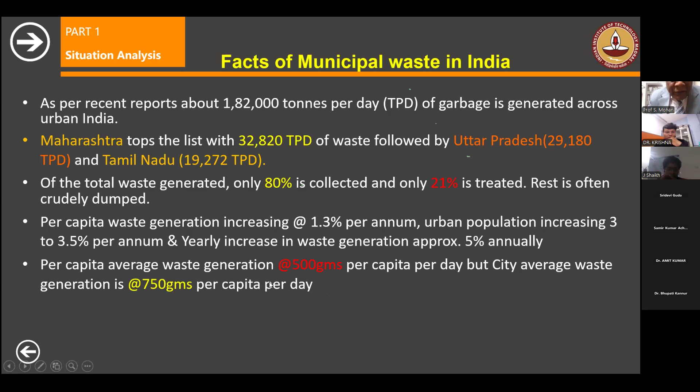And the per capita waste generation is also increasing over the years, especially at the rate of 1.3% per annum, whereas the urban population growth is 3 to 3.5%, so almost half of it is waste generation increasing. The per capita waste generation is around 500 grams per capita per day, but the city average, especially in Chennai, goes up to 750 grams - almost nearing 1 kg per capita per day. So for everyone, it's generating around 1 kg per capita per day.

Still, almost 75% of municipal authorities are continually dumping their municipal waste in an unhygienic manner, leading to health issues and environmental degradation. In fact, if you look at WHO data, there are around 25 types of diseases that can be prevented if we are good at solid waste management in India.

And if you look at it, every day almost 2 hectares of precious land is lost, which amounts to 730 hectares per year. These are all within city limits, and sometimes it is at the center of the city also. So you can imagine almost around 100 crore is being wasted because we are not managing that particular thing in a clear way.

If immediate remedial action is not taken, cities will not be allowed to waste so much farmland, as evident from agitation, because many villages are against this.

And if you look at the generation, urban is 72%, and within that, 6 cities alone account for around 21% of the waste, whereas rural India is only 7%. That means urban India itself is generating around 93%.

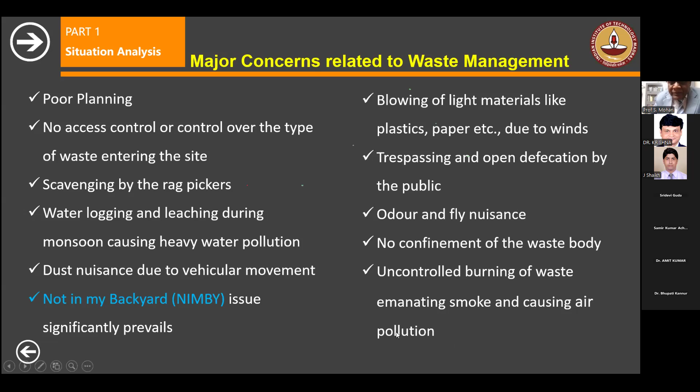One issue is we don't have a plan. We just dump waste assuming nothing will happen, but that creates problems: scavenging by rag pickers, waterlogging and leaching through monsoon causing heavy water pollution, dust nuisance due to vehicular movement, and the NIMBY principle, very much prevailing especially in our country.

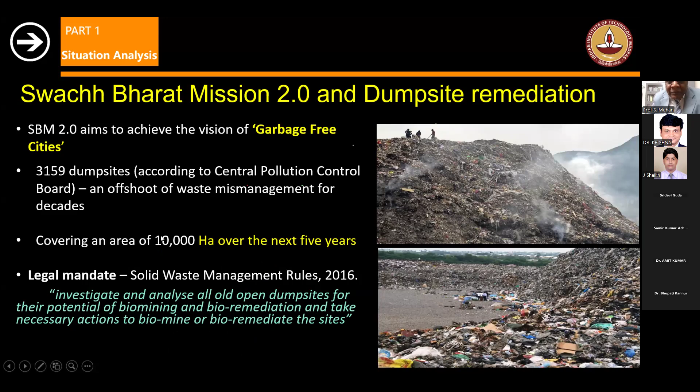One major component of that is dump site remediation. So if you want to write a project, this is one of the good areas, because we have a lot of dump sites in our country — almost 3,200 dump sites, an offshoot of waste mismanagement over the decade, covering almost 10,000 hectares over the next 5 years. Even though we have a legal mandate by the solid waste management rules to investigate and analyze all open dump sites for their potential for biomining and bioremediation, and take necessary action to biomine or bioremediate the site, this itself is a good area for research. We can go ahead with either geotechnical survey or geo-environmental study — this is one of the major problems you can take up. You'll also have good satisfaction trying to solve a problem that is right below your nose; you can just see the dump site.

Uttar Pradesh has around 611 dump sites, Madhya Pradesh 328, Maharashtra 327 — only Lakshadweep has no dump site, of course, since it's a small area. So we have dump sites almost everywhere. Even Tripura has 4, Goa 9, Chhattisgarh 8, Meghalaya 6, and Delhi 3 — though Delhi's 3 are very big sites.

The dump sites only reclaimed or capped number just 87, and there are still many dump sites that need attention. Dump sites converted into proper landfills number only 14. So out of 3,200 sites, only 14 plus 87 have been addressed — more than 3,000 dump sites remain, causing a lot of problems in our country.

We call this legacy waste. Legacy waste is waste that has been there for a long period of time — aged municipal solid waste, partly or completely undecomposed, containing scrap, polymeric and combustible material, and also inerts. This legacy waste needs to be dealt with. We will see later how we can solve this particular problem.

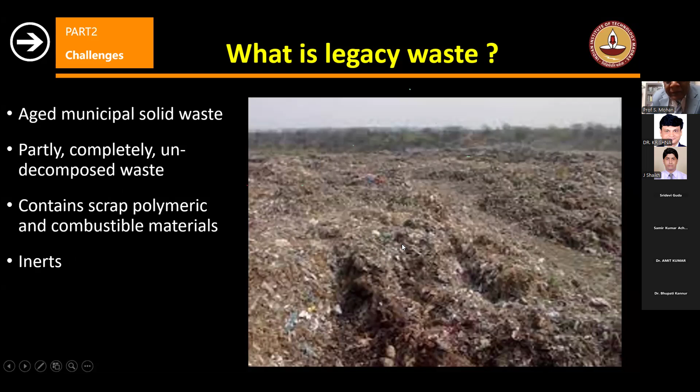There are challenges because of these dump sites. The environmental challenge is open dumps where waste is dumped in an uncontrolled manner. Provision for leachate and gas control systems do not exist, so whatever comes out becomes an air pollution problem, and leachate also goes into the groundwater. Most disposal sites are unfenced, and open firing of municipal solid waste is very common — this firing is done to recover scrap material like iron and other metals.

The wasted recyclable materials have lost their inherent energy from production, and leachate from unlined and uncovered dump sites contaminates groundwater as well as surface water — especially volatilized heavy metals like mercury and lead, and dioxins and furans from open burning dump sites and low-standard incinerators, because of chlorine present; once burning starts, it becomes a big issue.

Crude dumping encourages breeding of insects and rodents, and open dump sites are top sources of methane and CO2 — methane has 20 times the potential of CO2. So if you talk about global warming, climate change, or the greenhouse effect, this is one of the most important sites where CH4 is emanating, along with bioaerosols and dust from handling, and smoke particulates from open dumping. In simple words, if you want to see water pollution, air pollution, and land pollution all together, the dump site is one example where all these pollutions are available.

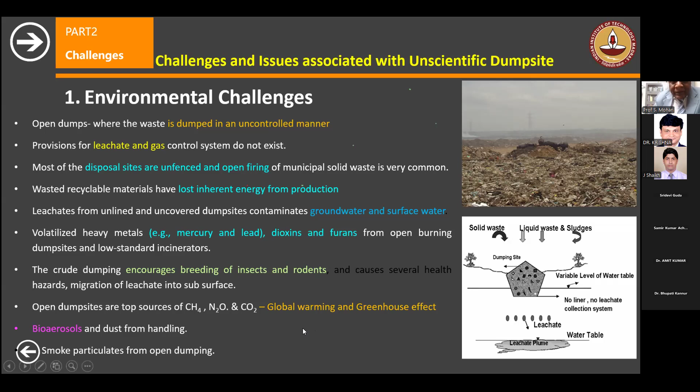So that means we have to take a little better care of this. The second aspect is the health challenges.

There is a lot of infection, animal diseases, and respiratory diseases because of the bioaerosol, cancer, for those who are living there. In fact, there was good research on this. Those who are rag pickers, they never live beyond 45. That means very unfortunate people because they have been swallowing or breathing these dioxins and other things. So they get cancer, headache, injury. There are many things, so health challenges are very much present in these unscientific dump sites.

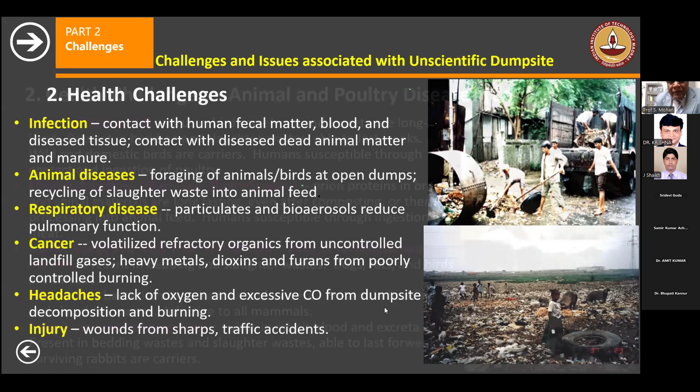And even the bird flu or the mad cow disease and other things, it was started from open dump sites like this, especially from pig kind of animals.

So if 1 ton of municipal solid waste is there and you are just dumping it without any capture, it will come out with 1610 kg of CO2 equivalent. That means you can just see 1 ton gives 1610 kg, which is 1.61 tons of CO2. So even though municipal solid waste is 1 ton, we get 1.61 tons of CO2 equivalent.

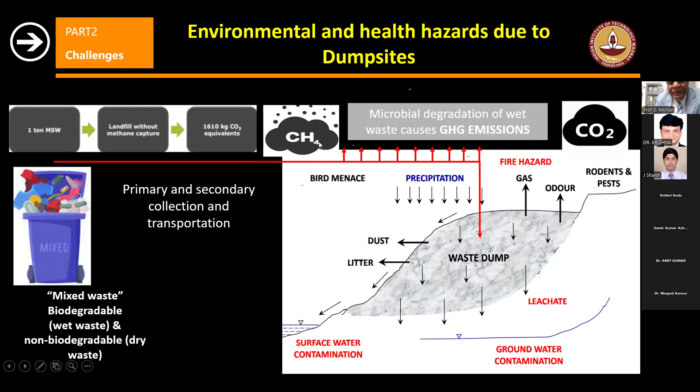And this CO2 is the main reason. We have gas, water, fire, everything coming over here, and surface water contamination, groundwater contamination, all those. And especially the CH4 emission is very high at these particular dump sites.

So socioeconomic challenges include the limited land availability with the urban local bodies, because huge lands are locked up in dump sites. In fact, many times people are arguing for more sites for dumping solid waste.

Neighborhood land cost depreciation due to public nuisance. Neighborhood residents face various health issues, and the neighborhood is socially disadvantaged with respect to others, creating a bad impression about the local government, and also it is unhygienic. So it has environmental challenges, health challenges, and socio-economic challenges as such.

And on the governance side, that is much more difficult. There are coordination disputes between Panchayat Raj and municipality, similar coordination issues between state and urban local bodies, and legal disputes. There were a lot of public interest litigations on this. So this is one area where there is a lot of scope for environmental, geotechnical engineers, and other engineers to come out with good solutions, which is happening over a longer time. We know that it's a problem, but nobody works on this particular thing.

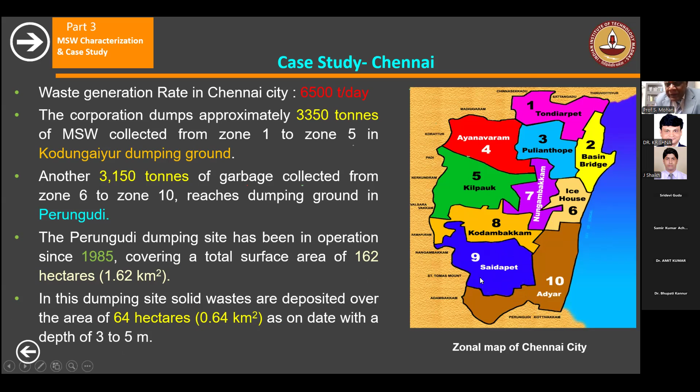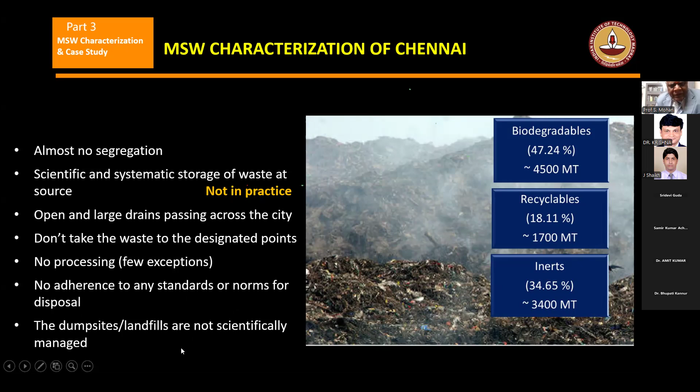The characterization for Chennai is that there is no segregation. So that's one of the major issues that we can't find a solution for. Scientific and systematic storage of waste at source is also not in practice, except in some 3 or 4 wards. Open and large drains passing across the city don't take the waste to designated points, and there is no processing, no adherence to any standard. The dump sites are not scientifically managed.

Food waste is around 8%, green waste is 32.25%, and this itself you can reuse for composting and so on. But we don't do it. We all send that back to the dump site.

Timber is 7%, consumable plastic is around 5.6%, and industrial plastic is around another 1.18%, so totally around 7%. Steel and material, wax, textile - if you look at it, these are all things that can be recycled. Only the green waste and food waste can go to compost, provided that we come out with a way to separate these waste streams. But what we do is we mix everything together in one place. That is the major issue that we are facing, not only in Chennai, but also in all the places.

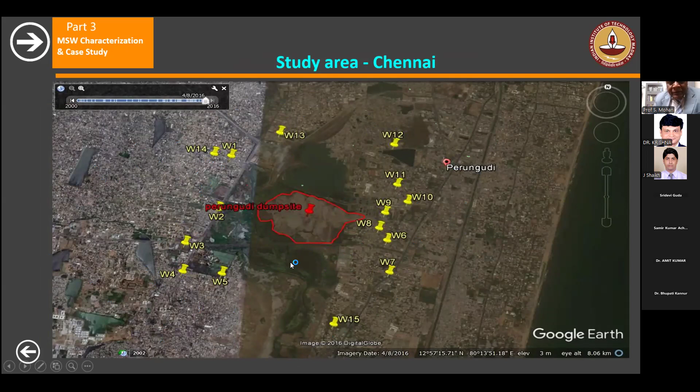So this is a study area where the dump site is there, and we took a lot of samples - water samples, soil samples, and so on. I'll just talk about the water samples. You can see the groundwater characteristics at these particular places.

So let us say lead. The maximum limit is 0.01. But you can see here it is 0.052 at the minimum. Between 2006 and 2022 it varies up to 0.76. So 0.01 is the limit, but it's reaching 0.76.

Like that, chromium and also other elements, mainly manganese, lead, chromium - these are the more important ones. Lead will affect the kidney and also cause nervous system problems. Similarly, chromium will also have such a bad effect that we may not be able to do normal work in time.

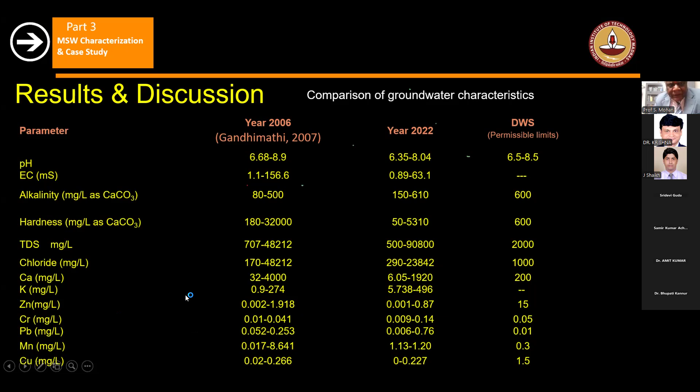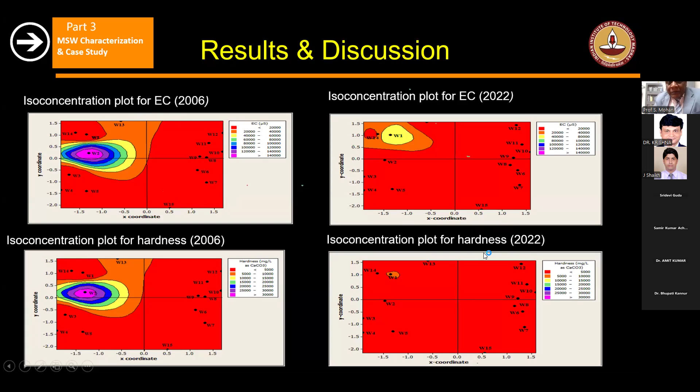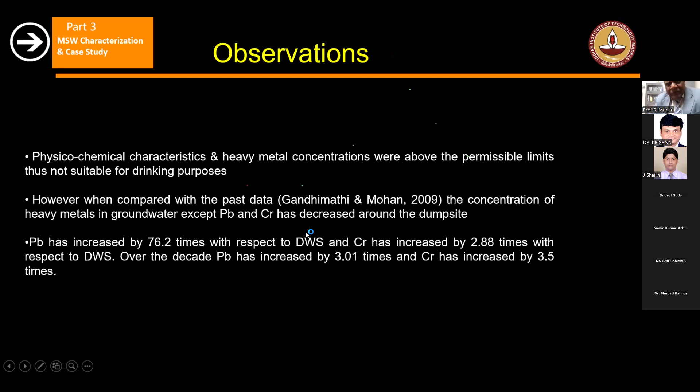So what we have done, first we tried to model the groundwater to see how it is going to affect other nearby residences like Adyar, Velachery, and so on. We really want to work with the government on this, since there will be contamination, or flood contamination, in this area.

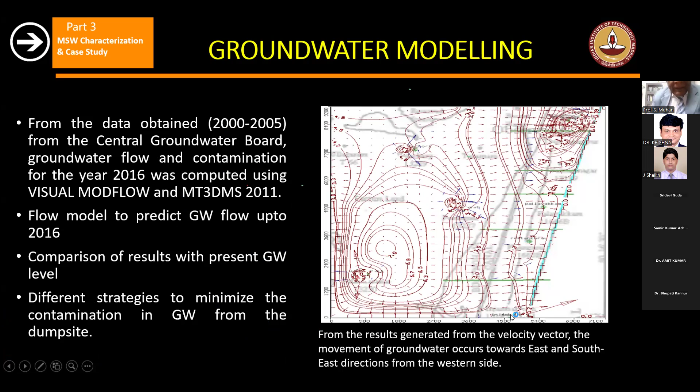So we found that the anaerobic digester bioreactor was the good one, but aerobic also works equally well. The only thing is with aerobic, we may have to supply air, or once a day we may have to shred the material or topple it down. That is what we did.

So this is one of the research works. He got his PhD on this long back.

More importantly, if you look at the legacy waste and make an analysis, a significant proportion becomes fine soil-like material after some 5 or 10 years. The combustible material ranges from 15 to 18% on a weight basis, and the coarser particles are broken bricks and such. But by this time, the lead or chromium might have been leached out from these and gone into the groundwater somewhere.

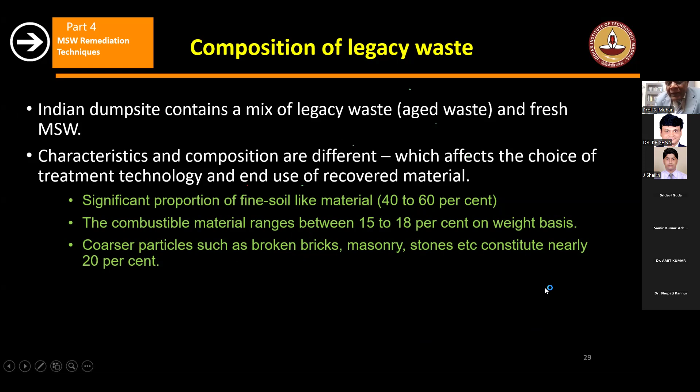So this is where it may be, but still the problem is not solved. That is the major issue.

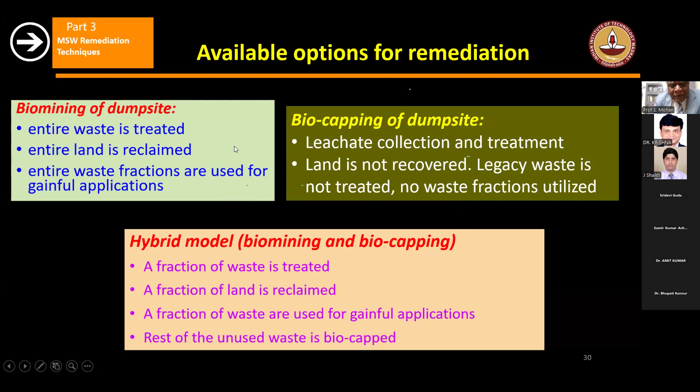But there are hybrid models combining biomining and biocapping, where only a certain fraction of the waste is treated, a fraction of land is reclaimed, and a fraction of waste is used for gainful application, with the rest of the unused waste biocapped. But more importantly, biomining of dump sites is one of the very good areas that any of us can work on.

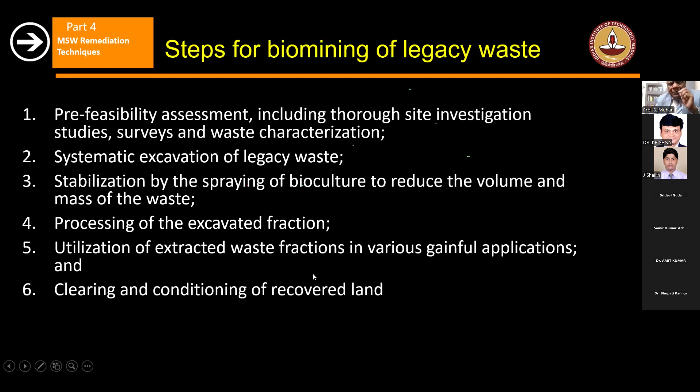So biomining involves making an assessment, including a thorough site investigation, surveys and waste characterization, systematic excavation of legacy waste and sampling, stabilization by spraying bioculture to reduce the volume and mass of the waste, processing of the excavated fraction, utilization of extracted waste fraction in various gainful applications, and clearing and conditioning of the recovered land. Even though we say this in principle, it can work very well.

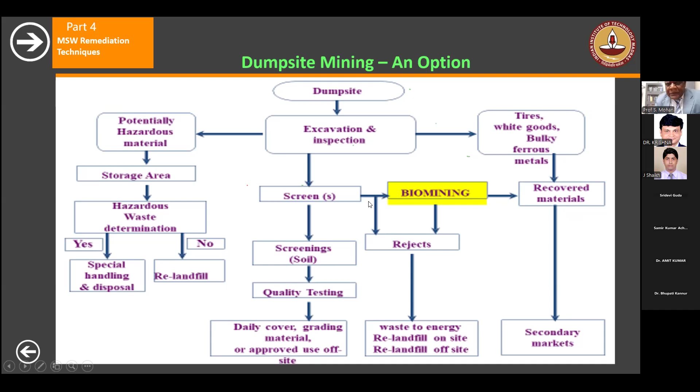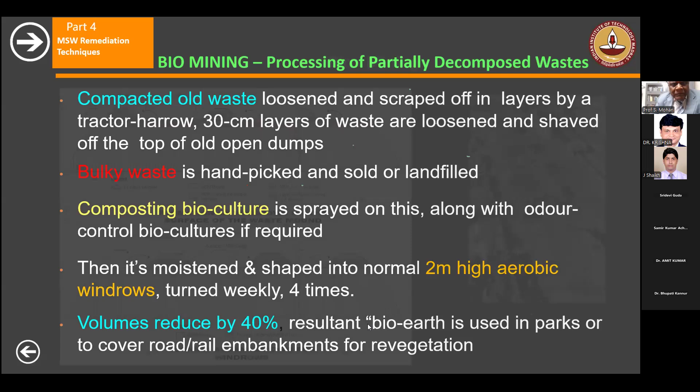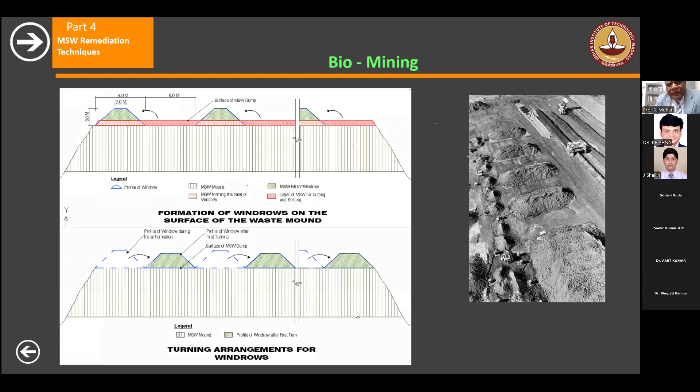So I'll give you some 2 or 3 case studies. One case study which we were involved in is Kumbakonam, a municipality near Thanjavur. The quantity of garbage was assessed by tacheometric survey, and it had occupied 10.5 acres out of the 14-acre dump site. The amount spent was around 400 lakhs, and the source of funding was the state government.

These 400 lakhs could be recovered by selling this particular land within no time. That's why the state government funded the entire thing.

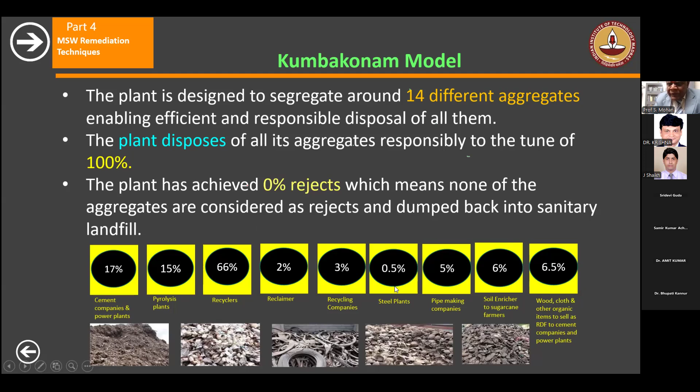Almost the entire area has been revised back to the original situation. It took around 9 months to finish all these things, but after 9 months, the entire 14 acres had been retrieved by the municipality. So this area is now being used to build government quarters.

So this is how they have done the first stabilization of waste. Then there is a series of machines: trommel, vibro separator, density separator, conveyors, and magnetic separator, which are used to process the entire area slowly. So that's the first model.

Similarly, the Nagpur model is based on bioremediation. This was for municipal solid waste of around 12 lakh metric tons. 80% of the old dump has been converted into scientific windrows, and a proprietary solution is sprayed over the windrows plus garbage, resulting in a 90% reduction of stink, menace of flies, among other things.

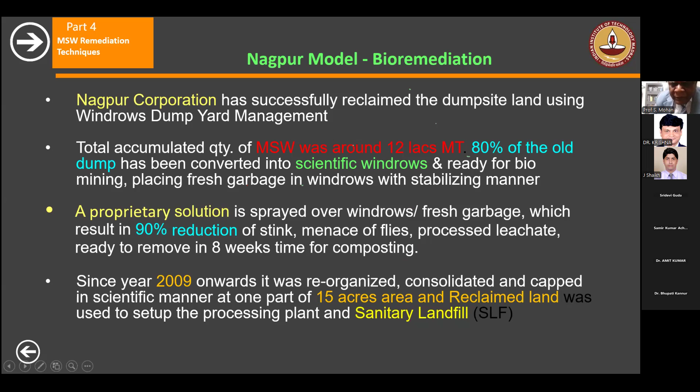From 2009 onwards, it was reorganized, consolidated, and capped in a scientific manner into one part of a 15-acre area, and the reclaimed land was used to set up the processing plant and sanitary landfill. So this is the Nagpur model, where windrows are formed and a solution is used to disintegrate or decompose whatever is possible.

The third one is the Mumbai model, called Gorai, in greater Mumbai. This was the first dump site, working since 1972 onwards. Then companies came forward, like United Phosphorus Limited, along with a Netherlands company, who made the acquisition for the civil work, with 15 years of O&M, and it is still going now. They also got CDM benefits for this particular project.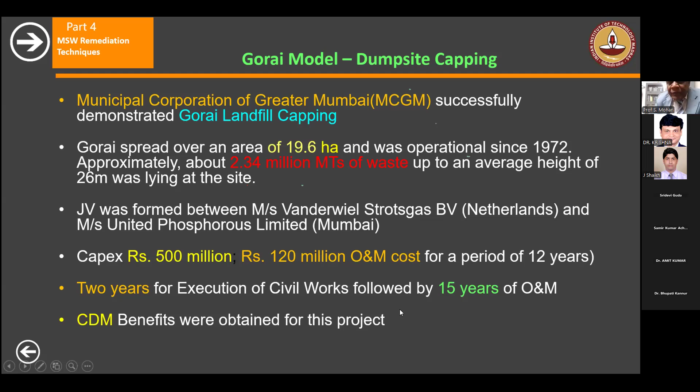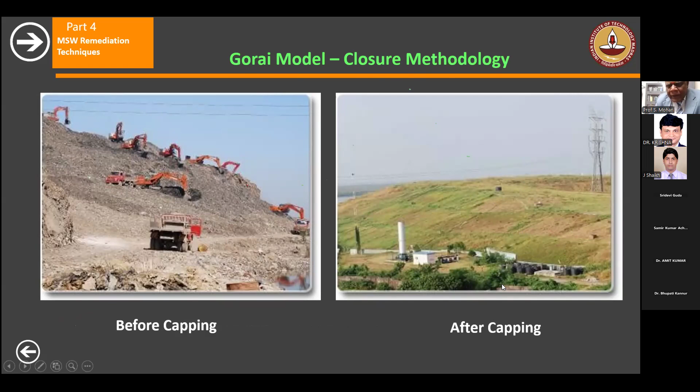And here it is, more on both complete remediation plus capping that they have done. You can see the Gorai model, closure methodology, how this was the original thing. Then after the volume is reduced, they have put on the capping, and this is the office and everything that it is.

Biomining reclaims land that can be used and no maintenance cost is involved. Whereas with capping, the land cannot be reused. Biocapping calls for maintenance cost year by year to manage methane and leachate, because the gas also will be coming and leachate also will be coming. So we may have to do the treatment of leachate, and gas also need to be treated, or it should be scrubbed and dealt with.

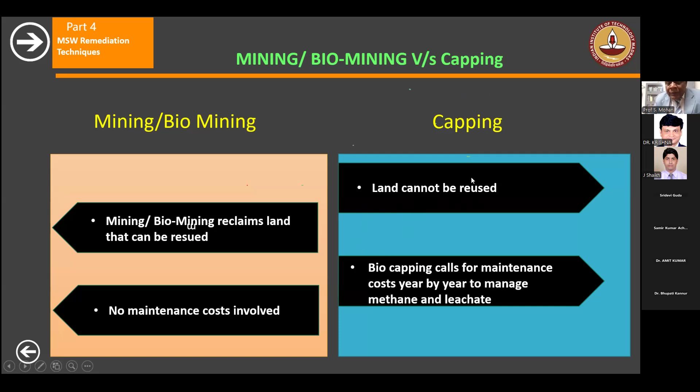So comparatively, biomining will be much better that way. But of course it depends upon the volume and also the composition. Sometimes it may not be viable to go for biomining, like the Gorai thing.

Another example is the Ghazipur dump site. The CRRI, Central Road Research Institute, has used this entire municipal solid waste for embankment construction in the Delhi Meerut Expressway. And Ghazipur still receives 2,000 tons per day, but whatever is available, they have used for embankment construction. So this may be good research, especially for geotechnical engineers.

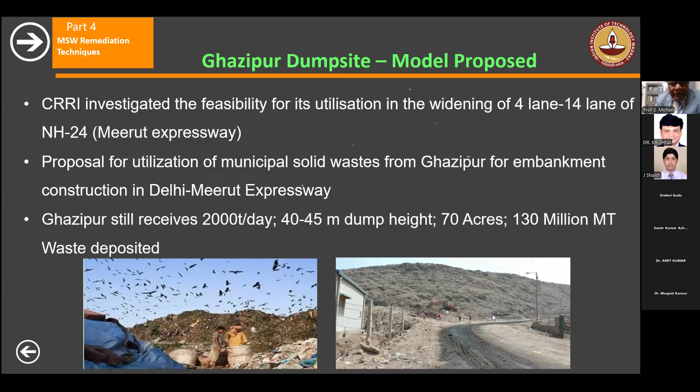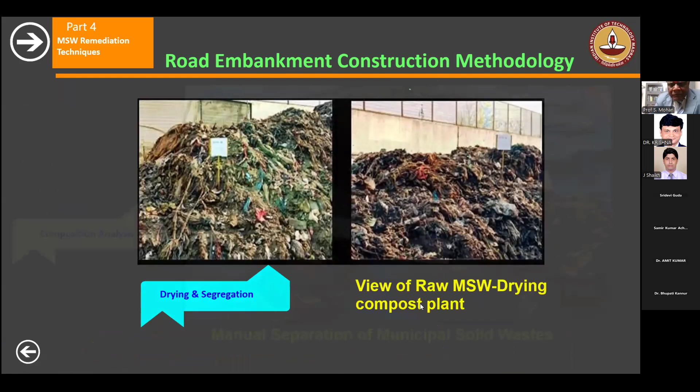And this was designed, how the embankments and roads have been designed, and below the subgrade you can use the municipal solid waste, with some intermediate layer and also another municipal solid waste. So this may be one of the good kinds of things that we may utilize for road construction, rather than putting all new materials. So maybe somebody has to do a lot of research on how municipal solid waste will behave over the period of time and so on.

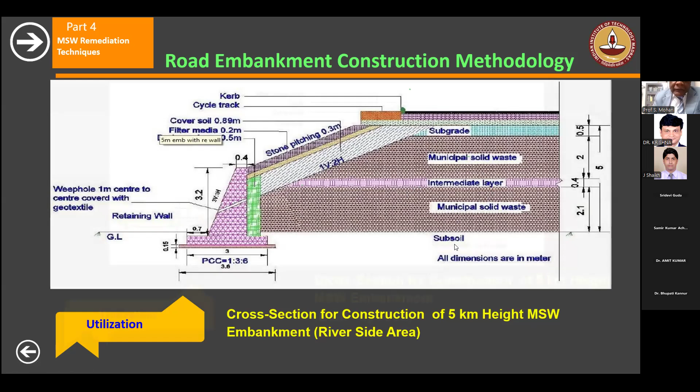So this is another one, this is a 5-meter height MSW embankment.

And bioreactor landfill is one of the good solutions, where the leachate itself will have a lot of microbes, and you recycle it from the top and spray it, so automatically accelerated decomposition takes place. This was really wonderful because we have done a lot of experiments and found that it works very well.

So again, we have anaerobic, aerobic, and hybrid methods. The bioreactor landfill mainly does decomposition by leachate recirculation. Normally decomposition takes around 30 to 50 years, but here within 5 to 10 years it can occur, and it can also solve some of the major environmental problems. So this is how the gas production and all those things happen under anaerobic conditions.

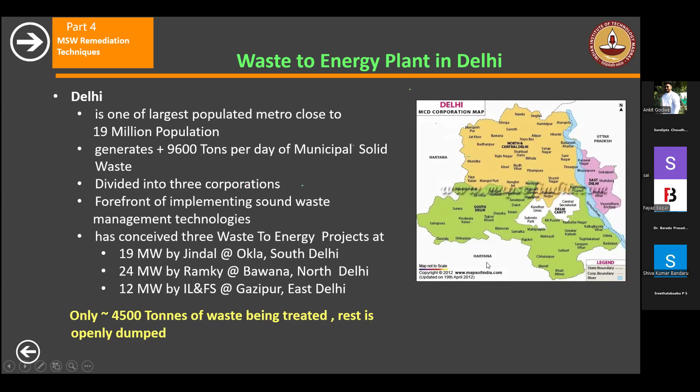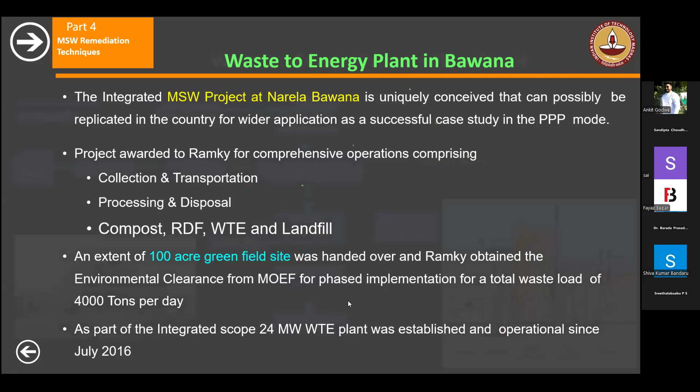Delhi is more focused on waste to energy plants. Even though there was some failure, still these 3 plants are working very well, where the waste is completely converted into energy. Almost around 4,500 tons of waste is being utilized at these particular sites. The waste to energy plant at Bawana, which Ramky is working on, is very good, even now it works very well. So this is the flow sheet for that particular one.

So I think I'll give some way forward, what are the things that it is. It is important that new legacy sites are not created. There are already legacy sites, around 3,000 sites available. If we can come out with some solution for that, that itself is important. But at the same time, new waste should not be created.

So there also we may have to make a plan for how to separate the organic waste, inorganic waste, and then reuse or recycle that particular one. That is more important. We need good source segregation, 100% waste processing and treatment. Only rejects and inerts should be disposed of in sanitary landfills. This is what is really required: developing a sustainable fresh waste management plan, maximum utilization of the recovered fraction, utilization of reclaimed land, incentives, capacity building for the ULB and State Pollution Control Board, and construction and sustainable operation of sanitary landfills.

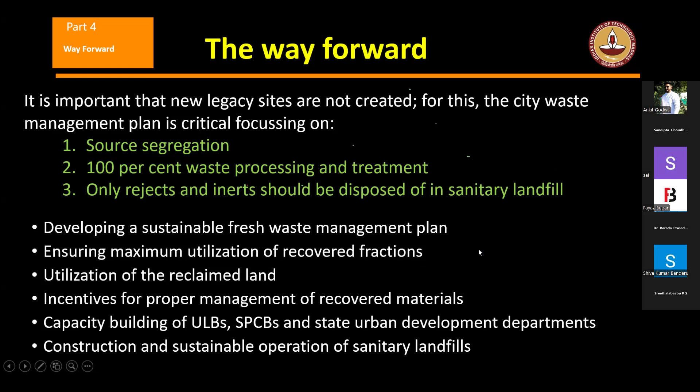Let me talk about something on life. With the permission of Professor Sridevi, I will give you a small thing. Life, whether you want to take it as pain or pleasure, depends on you. The pain is also challenging, so make some good effort to make it a pleasure, and challenge should be achievement. Pain should be converted into pleasure. That means we have to take life a little better.

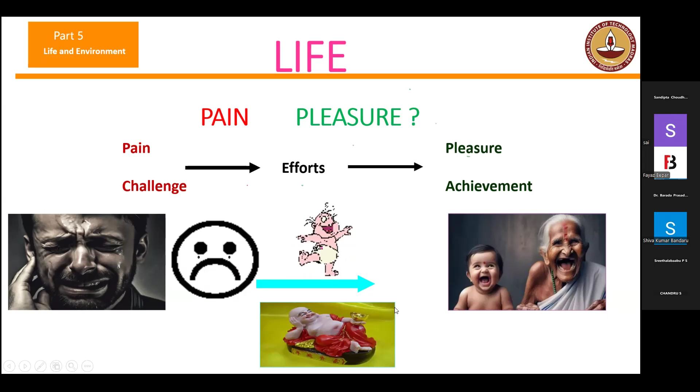I think we Indians are very good in lifestyle, so let us go back and try to come out with that. That's why I put a foreigner on the left side and our great Indian old lady and small boy who is really laughing very well.

I don't know how many of you know about this song, Jolly Wo Gymkhana, so let us be jolly together. The point is, a child laughs 200 times a day. I don't know if you have observed that, please do. A youth laughs 100 times a day, but after marriage and joining service, the 100 times become less than 20 times a day. That means somehow we don't want to laugh.

And no laughter as we grow older leads to all ailments. So this is maybe beyond after you retire. On the other hand, when you laugh, it's a real lighting system of the face, cooling system of the heart, and charging system of the mind. So try to laugh, don't always be very serious in your face, and any problem that we can solve, just smile it or laugh it. I think that way your life will be better.

And laughing releases feel-good hormones; automatically good hormones will be generated. In fact, dancing will be making your actions very well. So yes, I'm not saying that you need not dance, you should also dance. But more importantly, clapping—when you clap, at least 39 acupuncture points are being activated.

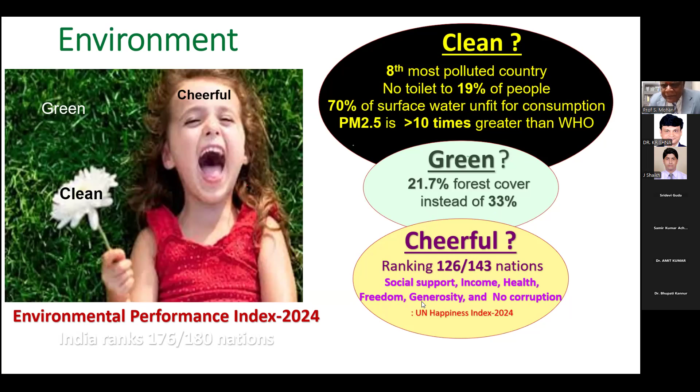Social support, income, health, freedom, generosity, and no corruption - these are all part of the happiness index. So we need to improve this for our country.

But on the other hand, you can be proud of our country, because it is the cradle of the human race, birthplace of human speech - the first speech actually originated from here - mother of history, grandmother of science and technology, great grandmother of culture and civilization.

In our country's practice, nature has been worshipped everywhere. A tree is always worshipped at the marriage stage and then planted by the married couple - you might have seen this in South India, it is very common. Bamboo cutting is done only 3 days a week so it is not completely eroded. Medicinal plants are used only on Saturdays, and banana is not consumed during the period of Durga Puja. So they try to create practices to preserve these things.

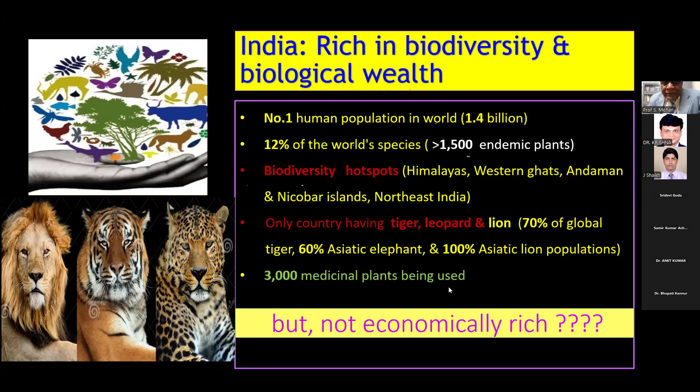Finally, I would like to share this with many of your teachers - how to teach Newton's law. This is a nice story which I like. A cow was walking, Newton stopped it, and it stopped. So he wrote his first law: an object continues to move unless it is stopped. Are you able to recall the first law? Then he gave it a force by kicking the cow. It made a sound, 'ma.' Then he formulated the second law: F equals ma.

So this is what all of you know. After some time, the cow gave a kick to Newton. Then he formulated the third law: every action has an equal and opposite reaction. So if you teach like this, nobody will forget all of Newton's three laws.